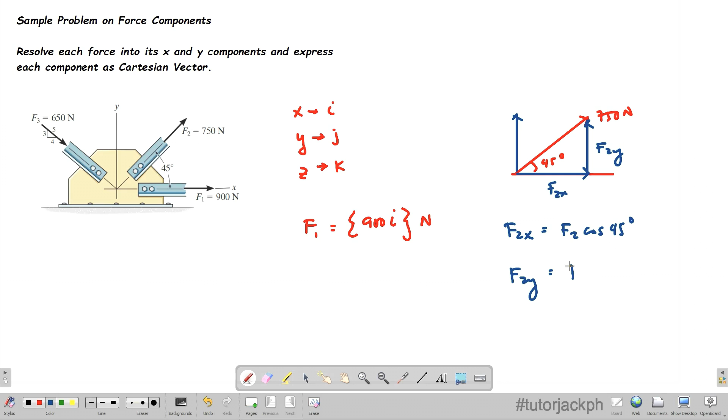So, para makuha natin si F2x, kailangan natin cosine. So, we have F2x is just equivalent to F2 cosine of 45 degrees, and then we have F2y is just equivalent to F2 sine 45 degrees. Dito tayo sa calculator natin. So, F2 natin is 750. So, that's 750 times cosine 45. That's 530.33